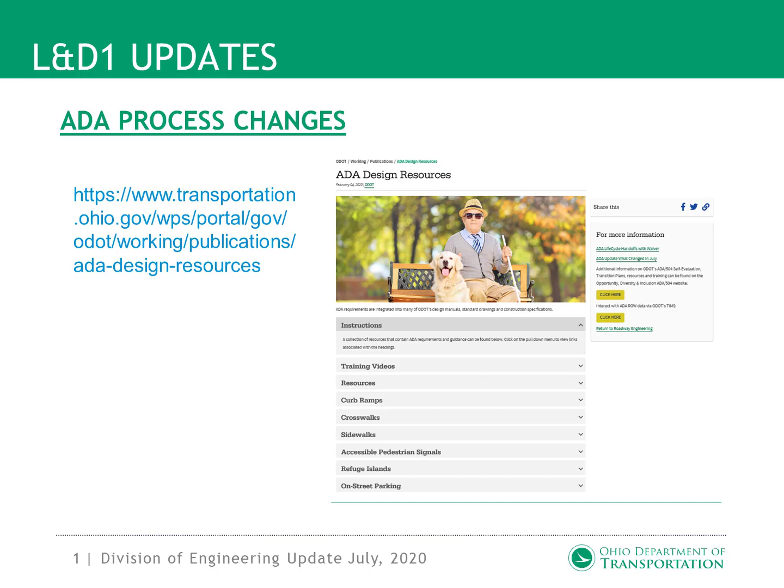Section 306.1.1 Exceptions to PROWAG. Recognizing that there are some situations where the construction of an ADA compliant feature is just not feasible, ODOT has developed a waiver process for documenting these situations. These situations have arisen in the past, but we haven't formally resolved the noncompliance by reviewing and documenting the issue.

Waivers may be granted based on the following conditions. Existing physical constraints include, but are not limited to, underlying terrain, right-of-way availability, underground structures, adjacent developed facilities, drainage, or the presence of notable natural or historic features.

Disproportionate cost equals 20% of the project cost. Also, for features that are outside the project scope. For instance, if right-of-way would be required to construct a compliant ramp and no other right-of-way is being purchased on a resurfacing project. These conditions apply for alterations of existing facilities only, not new facilities.

Section 306.1.2 Documentation Requirements. Waiver forms are required to document cases where an ADA-compliant curb ramp cannot be constructed. An electronic waiver form has been developed and can be found on the ADA website.

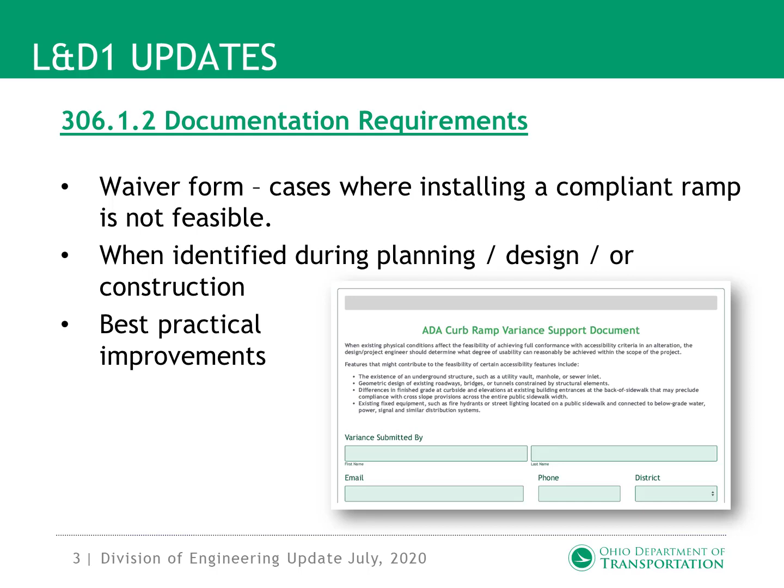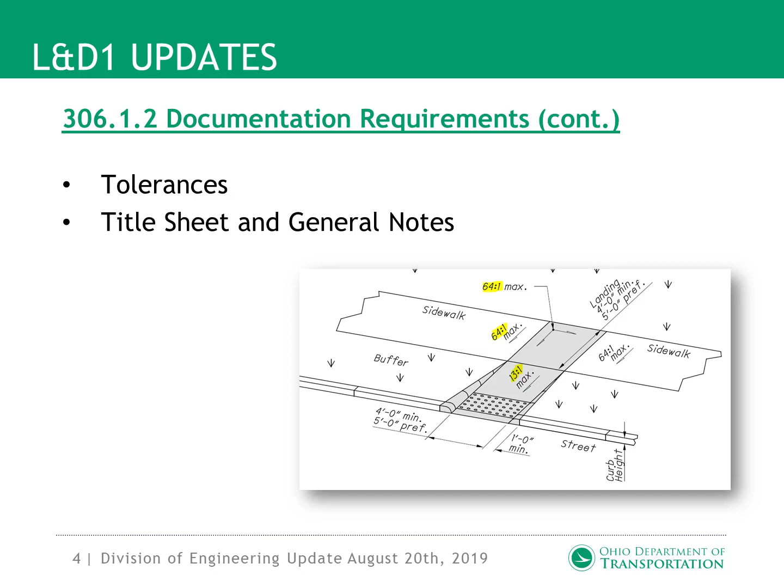Ramp slopes and cross slopes have been slightly changed to allow for a construction tolerance. Cross slopes changed from 50:1 to 64:1, and ramp slopes from 12:1 to 13:1. Waivers are only required where PROWAG standards cannot be met. The title sheet of a set of construction plans should note the presence of any waiver on the project, and further details should be supplied in the general notes.

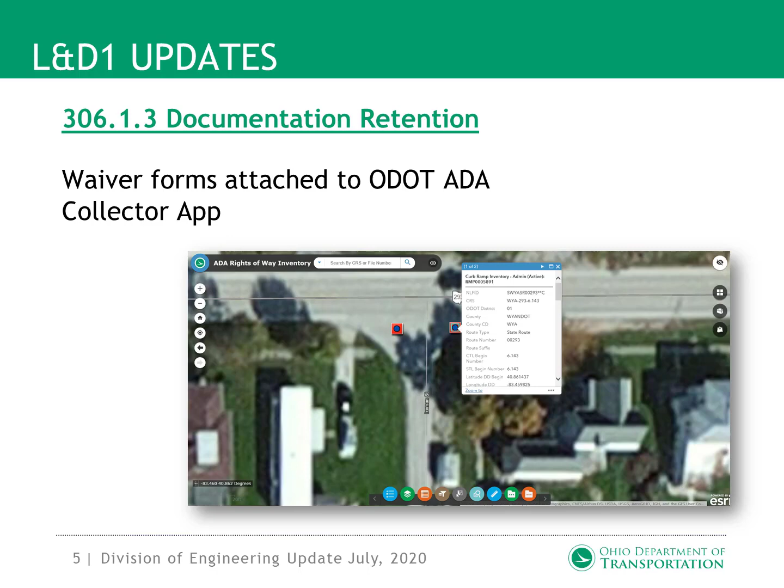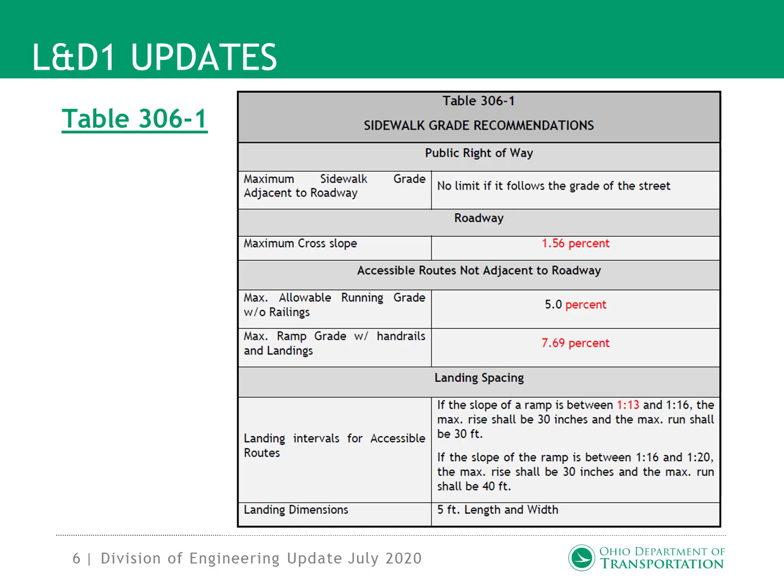Section 306.1.3 Documentation Retention. Approved waiver forms should be attached to the individual ramp in the ODOT ADA Collector app. This provides the department with a record of a waiver. For questions related to the Collector app, consult the District TAM Coordinator. Table 306-1, Sidewalk Grade Recommendations, was updated to reflect the change in slope and cross-slope values.

Section 306.3.4, Curb Ramp Types. Ramp types were organized into tiers of preference and design. Designers should work their way down the tiered list with a diagonal ramp being the last choice after all other design options have been exhausted.

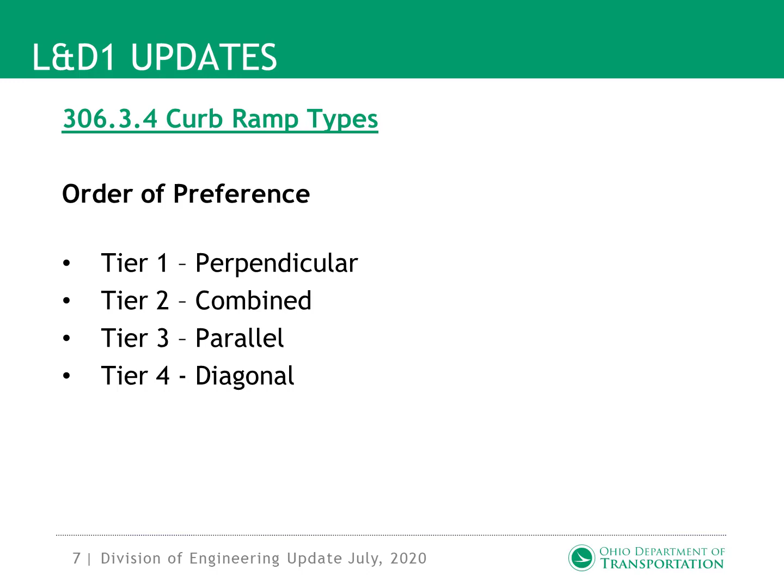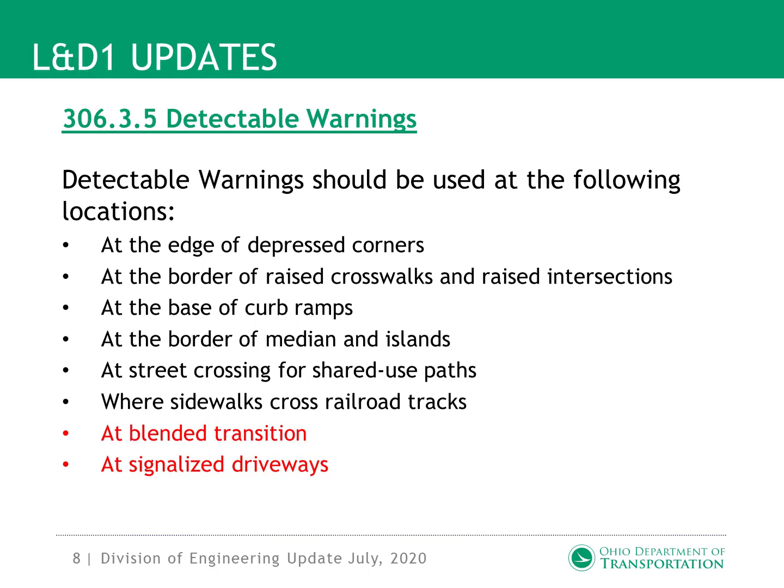Section 306.3.5 Detectable Warnings. Blended transitions and signalized driveways were added to the list of locations where detectable warnings are required. Section 306.3.8 Blended Transitions. There's been some confusion as to what a blended transition is, so we added a section defining one. It is basically a crossing where the sidewalk meets the street at a 5% or less grade. So these are very flat entryways. One big benefit to using a blended transition is that a landing is not required.

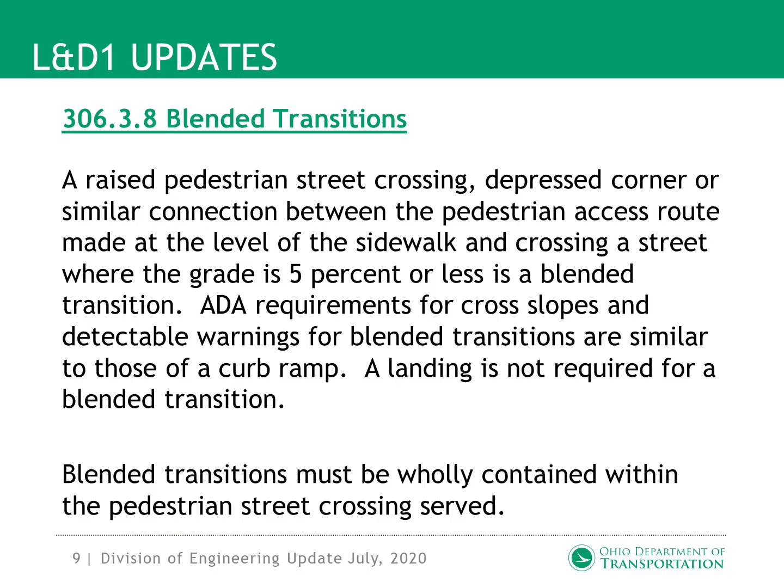Several figures were updated to the new slope and cross-slope values. These include figures 306-2, 306-3, 306-4, 803-2, 803-3, and 804-1.

Section 904.2.1 ODOT Guidelines for Community Gateway Monuments. This is a new section addressing issues with communities wanting monuments at interchanges. The definition of a gateway monument is any community-funded, freestanding structure or decorative sign, non-integral or non-required highway feature that will communicate the name of a city, village, township, or county. A community gateway monument may include the officially adopted seal, slogan, date of establishment, graphic, or logo that has been associated with the community.

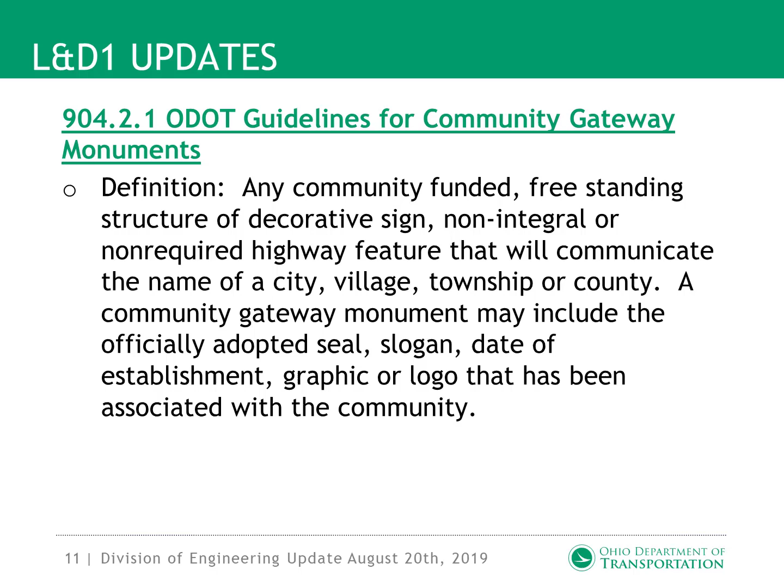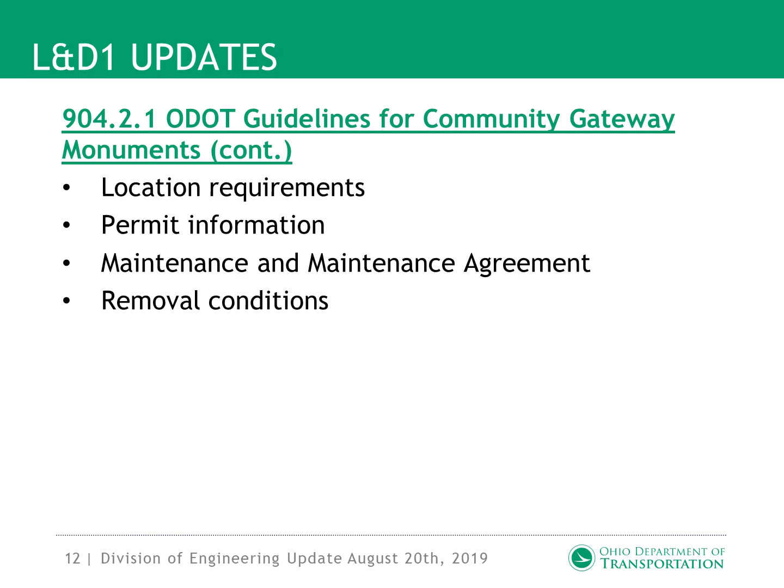Given within this section are location requirements, permit information, maintenance and maintenance agreement information, and removal conditions. The related information on what is allowed and not allowed is quite extensive and should be thoroughly reviewed when considering the approval of a monument.

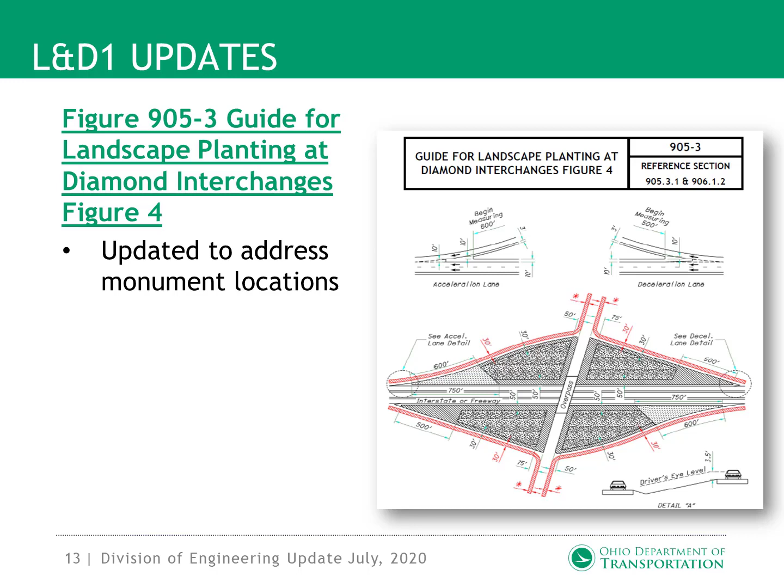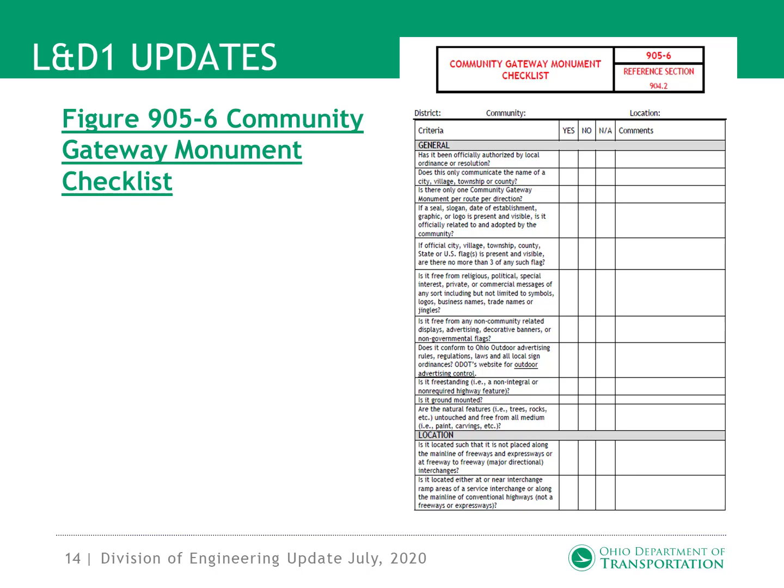Figure 905-3, Guide for Landscape Planting at Diamond Interchanges, Figure 4. The revised Figure 905-3 shows planting and monument restrictions on the outside limits of a diamond interchange. Figure 905-6 Community Gateway Monument Checklist was added to provide detailed guidance on monument eligibility, including location, size, maintenance, utilities, and appearance.

AASHTO released the second edition of the Guidelines for Geometric Design of Low-Volume Roads in 2019. The first edition addressed low-volume roads with 400 ADT or less. The new edition expands the definition for low-volume roads to minor collectors and local roads with less than 2,000 ADT. Since many of these roadways with low volumes also exhibit low crash frequencies, the new guidance gives designers flexibility by providing a recommended range of values for control criteria.

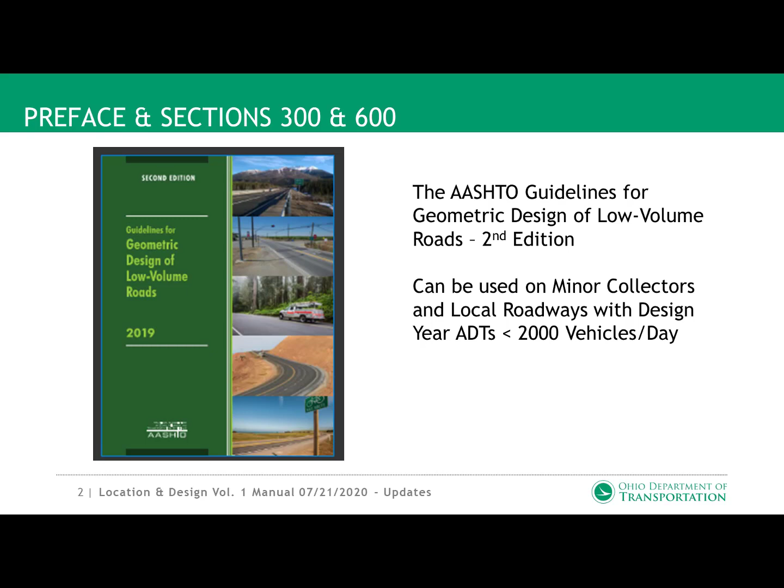Added guidance in Section 308.3.1 states that shared lanes, also known as sharrows, can be used on facilities that have a legal speed of 35 miles per hour or less. On facilities with legal speeds of 40 miles per hour or higher, shared lanes are not a good idea because of the speed differentials between a motor vehicle and a bicycle.

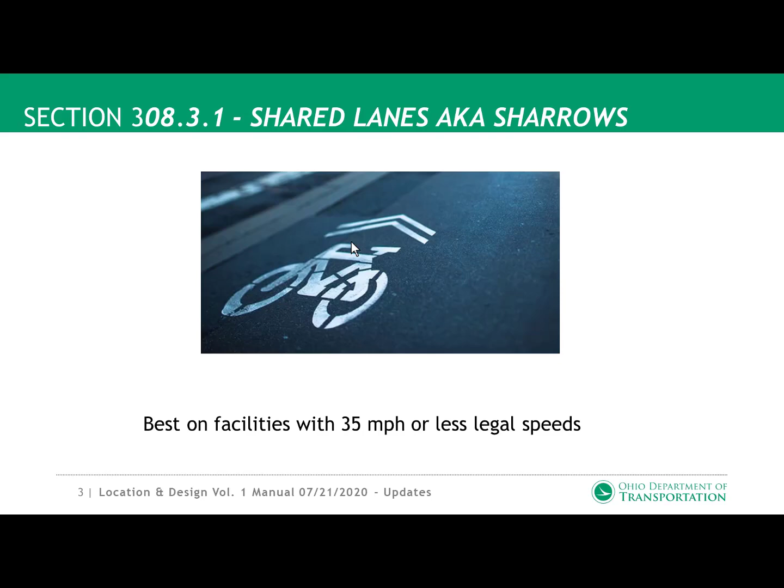A WB67 should be the preferred design vehicle instead of the WB62 for roundabouts at interstate, freeway, or expressway ramps intersecting an arterial roadway if the truck percentages are high.

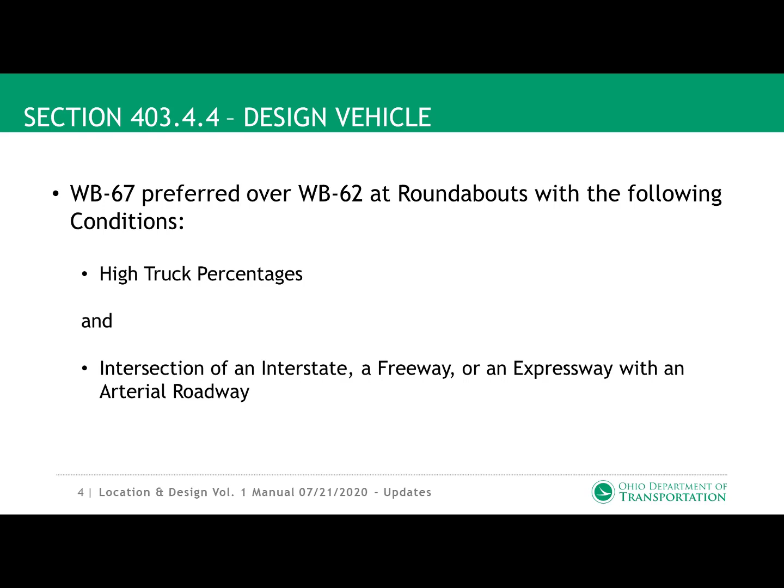Section 403.4.4.1 replaces design vehicle swept path with design vehicle tire tracking. The tire tracking is used to determine the curb locations at a roundabout. The swept path considered the tire tracking as well as the path of the truck, cab, and truck trailer. The swept path of the truck, cab, and trailer is necessary for vertical objects such as signs or poles, but not a factor in regards to curb placement. Tire tracking is more critical in curb placement.

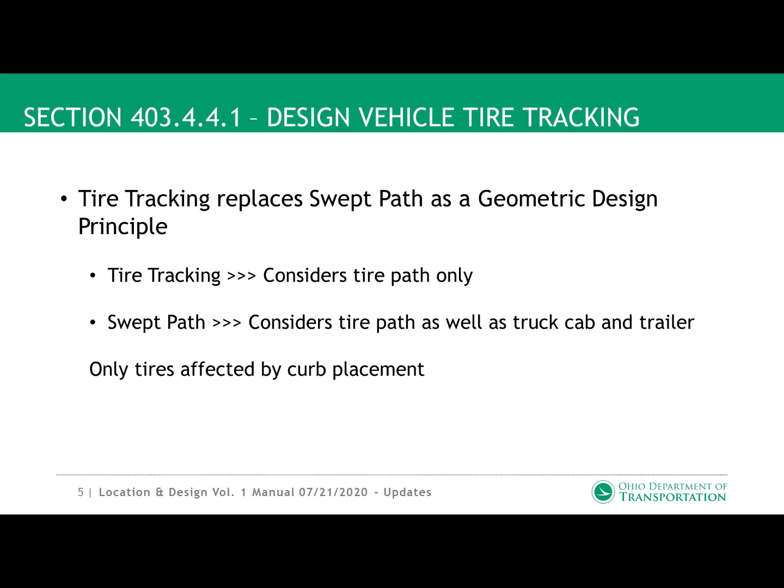Section 501.2.1.2 provides an additional limitation or disadvantage regarding the single-point urban interchange, SPUI. If a single-point urban interchange is built for an interim design year and will need to be expanded to the full build condition in a future design year, the construction costs for the expansion may be cost prohibitive.

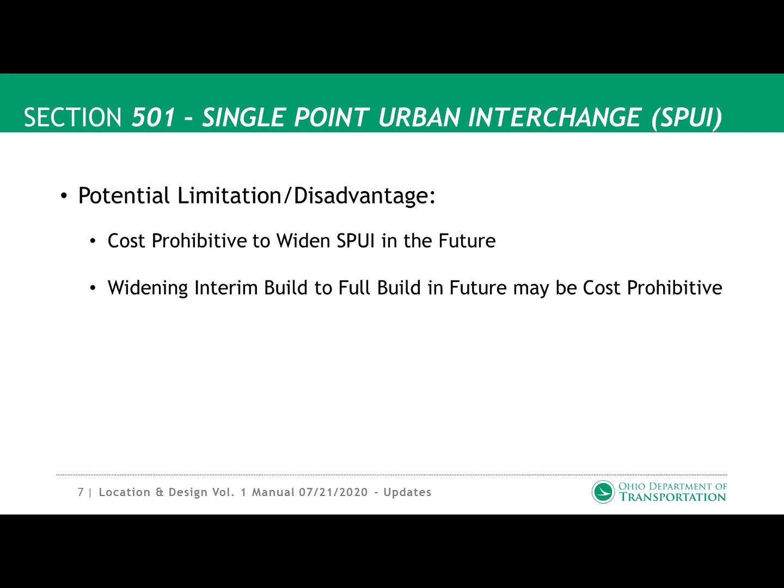Section 501.2.1.4 provides an additional benefit regarding the diverging diamond interchange, DDI. The bicycle pedestrian accommodations can be provided with either a single sidewalk through the median of the DDI or two separate sidewalks on the perimeter. The benefit of using the median sidewalk includes fewer ramp crossings, and the motor vehicle's left turns onto the entrance ramps is no longer in conflict with the bicycle and pedestrian traffic.

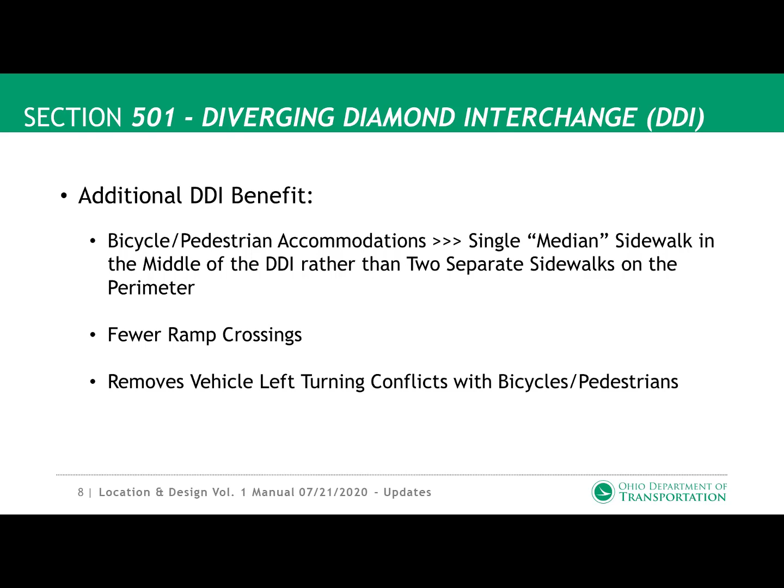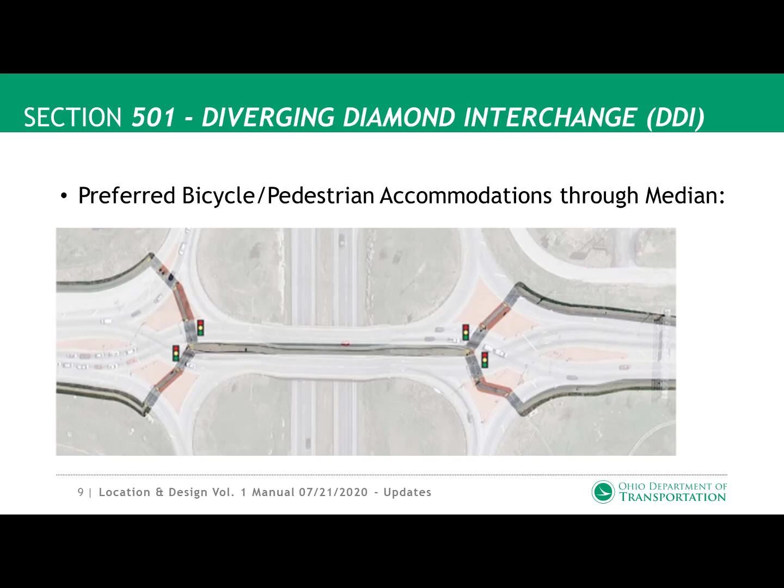This figure illustrates the preferred bicycle pedestrian accommodation through the median. This figure illustrates the alternative bike pedestrian accommodation on the outside.

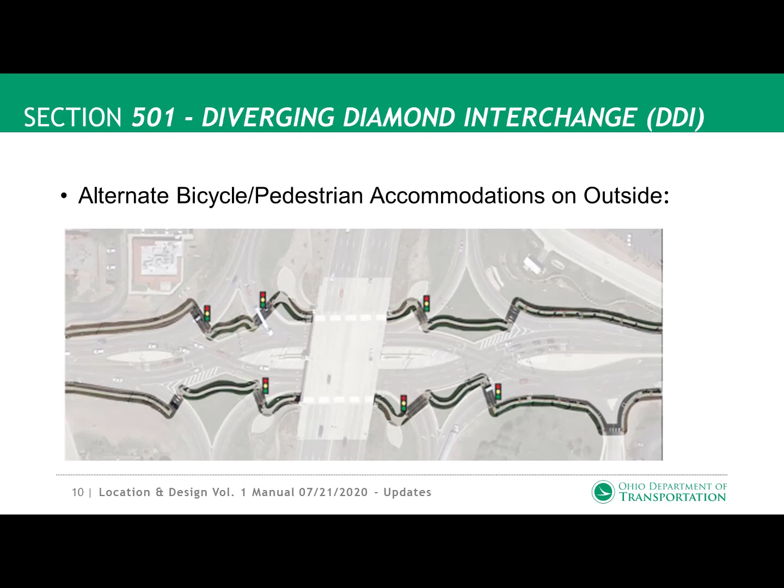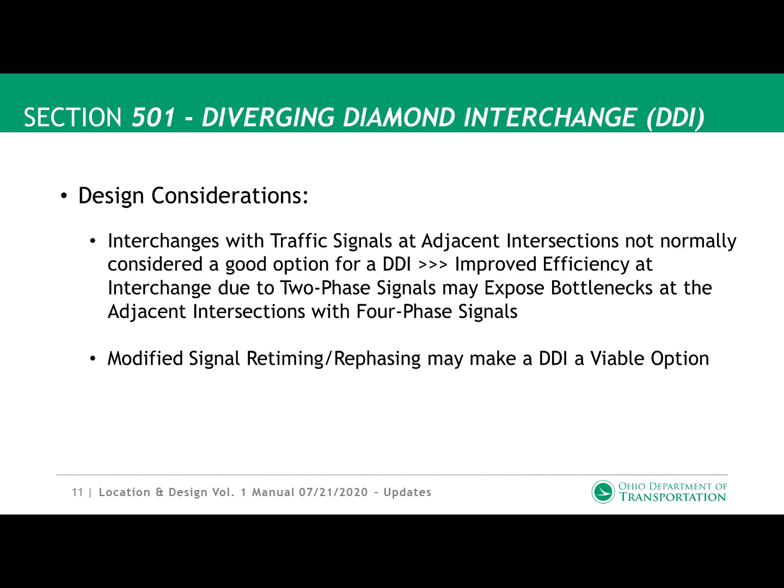Section 501.2.1.4 provides a design consideration regarding the diverging diamond interchange. The DDI may provide improved efficiency at the interchange intersections due to the two-phase signal operations, but it may expose inefficiencies and/or bottlenecks at the four-phase traffic signal operations at the signals adjacent to the interchange. This situation may have dissuaded the selection of a DDI as an option. However, retiming and/or rephasing at the adjacent traffic signals may allow the DDI to be a viable option.

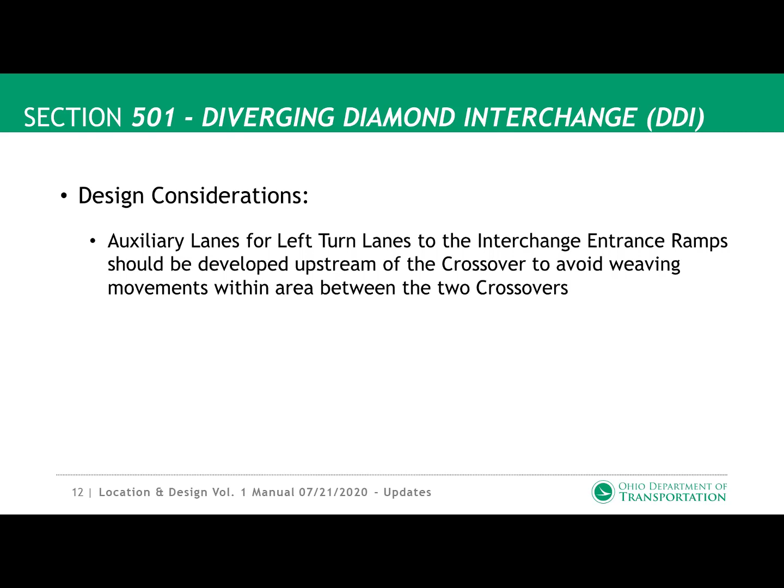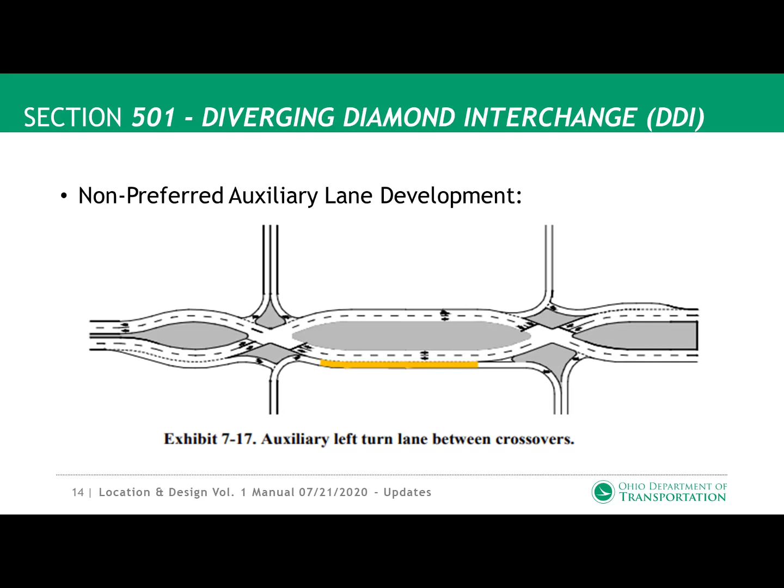Section 501.2.1.4 provides several additional design considerations regarding the diverging diamond interchange. The design speeds for the crossover alignments should be at least 10 miles per hour, but no more than 15 miles per hour below the legally posted speed limit. The left turn lanes on exit ramps should have enough curvature to ensure drivers turn into the inside through lanes and not make a wrong way turn. The left turn on the exit ramps should be placed as close to the crossover as possible to reduce clearance time, all red, to improve signal efficiency.

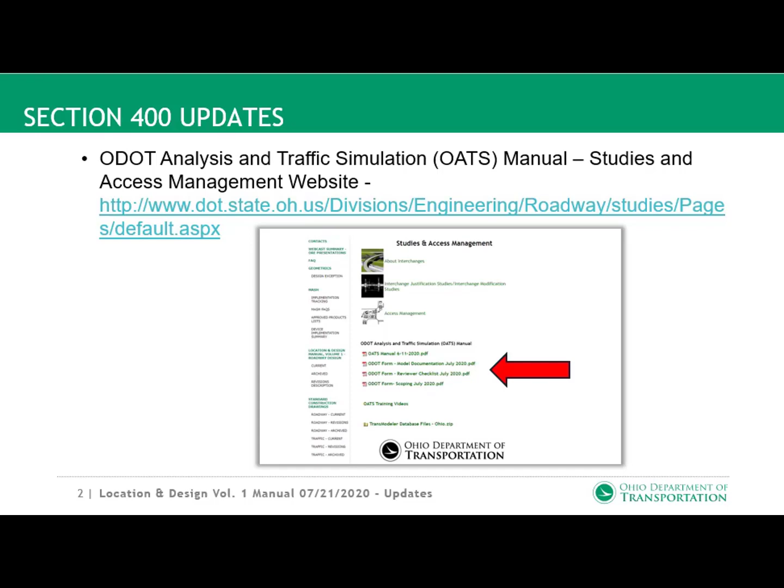Throughout Section 400, there are various references to the new ODOT Analysis and Traffic Simulation Manual, also known as the OATS Manual. This manual can be found at the link below, as well as additional resources such as the Model Documentation Form, Reviewer Checklist, Scoping Form, and some useful OATS training videos. A TransModeler database file for the entire state of Ohio can also be downloaded for use with TransModeler analyses.

Section 401.2.1 Signals. The method for balancing intersections has been revised to allow for more delay on the minor streets instead of balancing the delay for the minor and major streets as before. This more accurately represents how the signals will be timed in the field after installation. The goal is to minimize the overall delay without having significantly unbalanced approaches. All individual lane volume to capacity ratios for both the major and minor street must be less than 1 and preferably less than 0.93.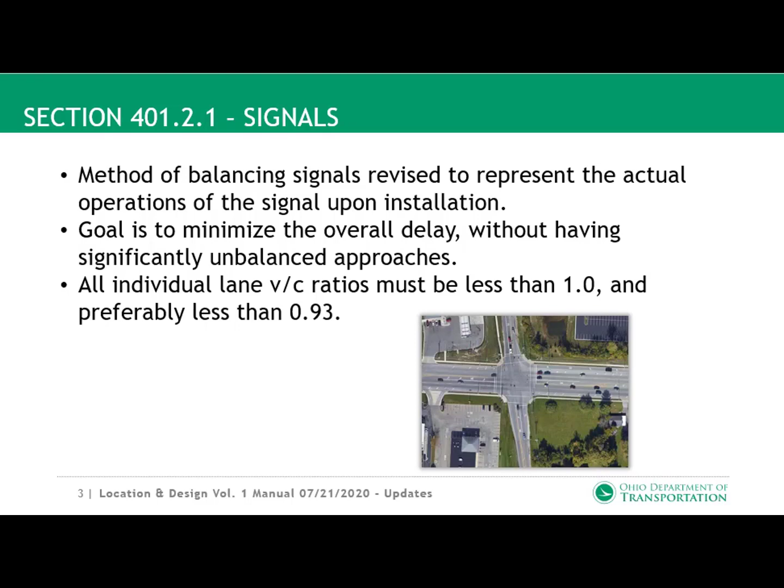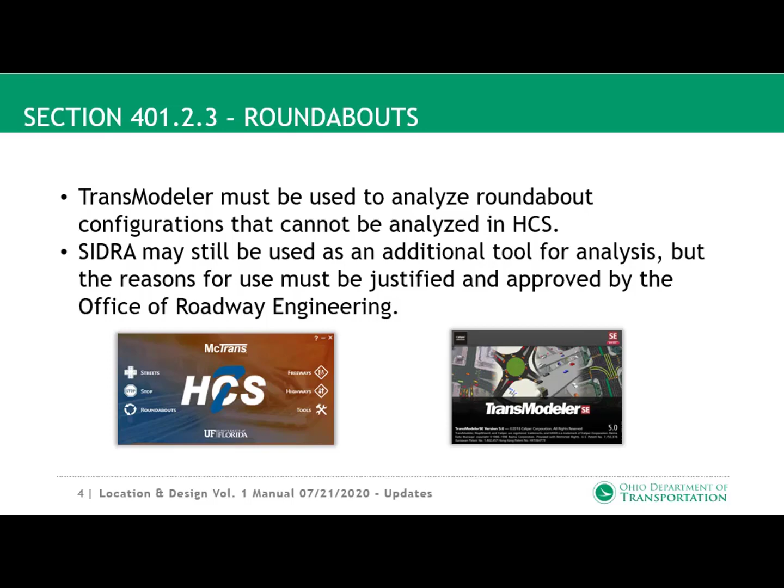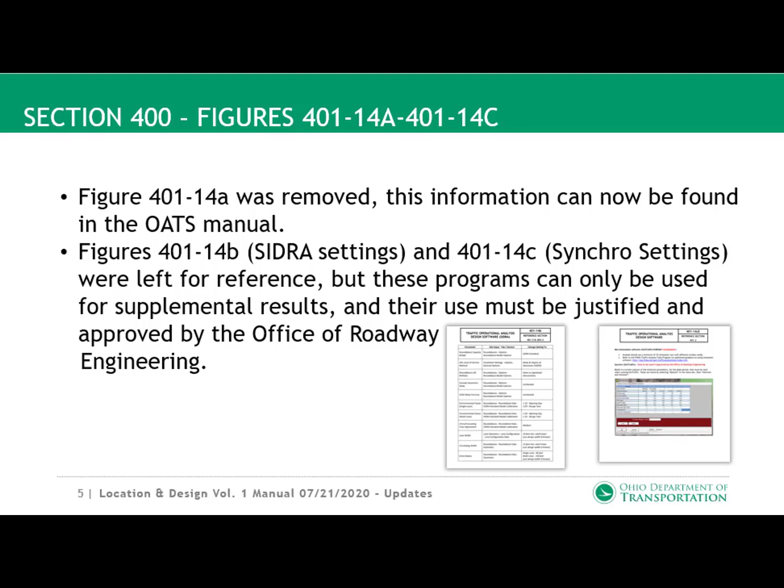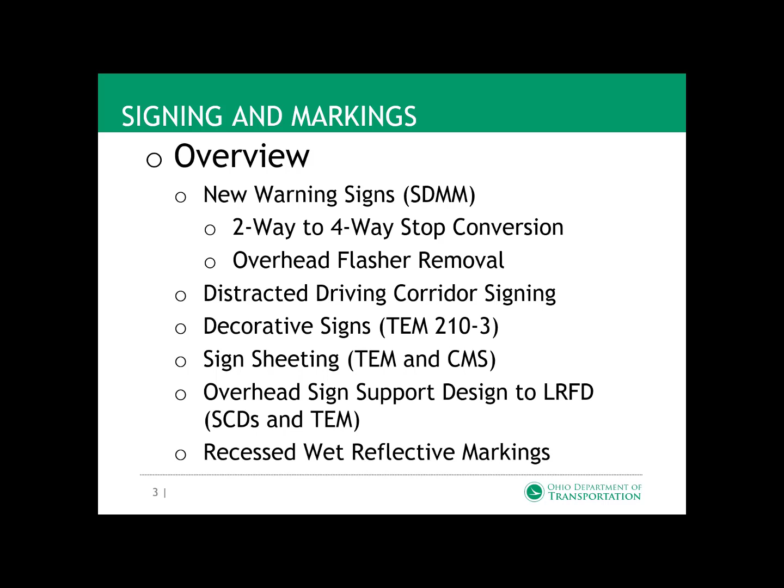The following presentation will describe the standards and specification changes for signing and markings that have been made in the April and July 2020 specification updates. The point of contact for signing and marking specifications is Dwayne Soyson, who can be reached at the listed email address and phone number. During this presentation, I will be describing the recent changes to signing and markings, including 2 new warning signs, distracted driving corridor signing, decorative signs known as community gateway monuments, sign sheeting, overhead sign support design in LRFD, and the recessed wet reflective pavement markings program.

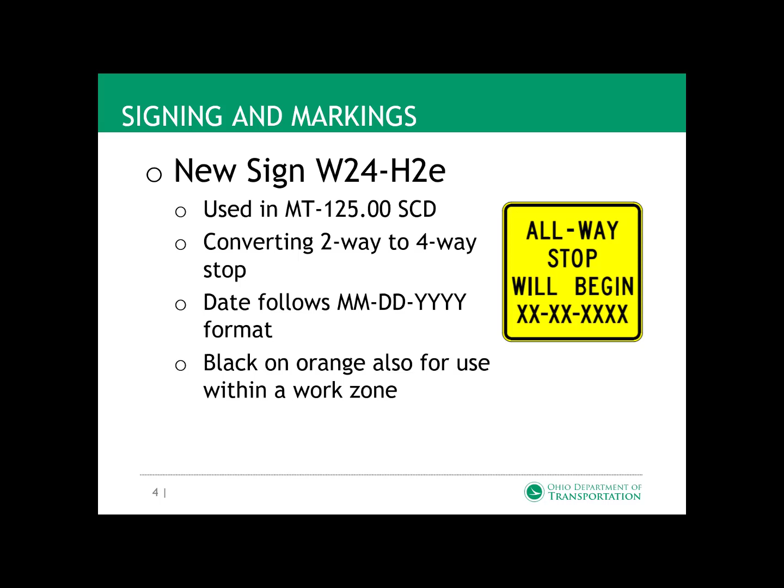Prior to implementing a two-way to four-way stop conversion, the public shall be given advance notice of the implementation by using a special sign. This sign, which is shown in the standard construction drawing MT 125.00, is to be provided in all plans which require the implementation of a two-way to four-way stop conversion. The sign design information can be found in the Sign Designs and Markings Manual.

Similarly, prior to deactivating an overhead flasher, the public shall be given advance notice of the deactivation by use of special signing. This sign, which is shown in the new Traffic Standard Construction Drawing MT 125.50, is to be provided in all plans which require the removal of an overhead flasher. The design information for the sign can be found in the Sign Designs and Markings Manual.

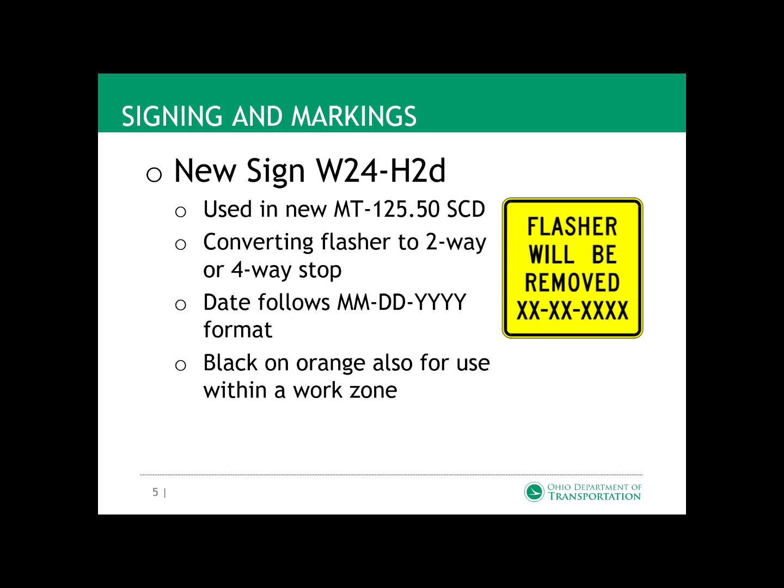Because distracted driving poses an increasing danger to Ohio families, the Ohio Department of Transportation Highway Safety Program and the Ohio State Highway Patrol have been working together to establish distracted driving corridors to discourage distractions behind the wheel, as well as speeding, aggressive driving, and other dangerous behaviors that lead to crashes.

7 different signs have been developed for potential use within a distracted driving corridor, including: safety corridor speeding and distracted driving, entering distracted driving corridor, safety corridor next X miles zero tolerance, X days since last serious crash, it can wait, this could be your last text, and leaving safety corridor.

Decorative signs have been recategorized as community gateway monuments, and guidance can be found in the Location and Design Manual, Volume 1, Section 904. A community gateway monument is defined as any community-funded freestanding structure of a decorative sign, non-integral or non-required highway feature that will communicate the name of a city, village, township, or county. A community gateway monument may include the officially adopted seal, slogan, date of establishment, graphic, or logo that has been associated with the community.

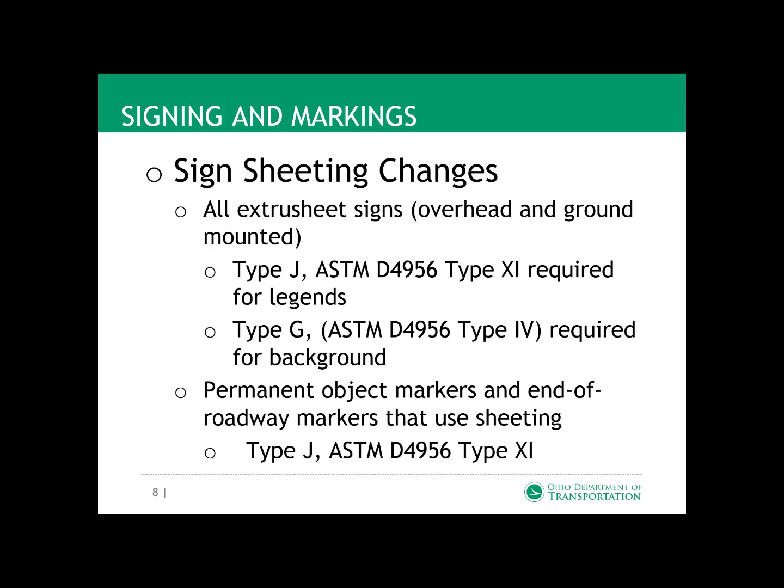The Office of Roadway Engineering has been working toward bringing ODOT more in line with the AASHTO structural standards by replacing the standard drawings that involve signal and sign supports and their foundations, utilizing AASHTO Load and Resistance Factor Design (LRFD) specifications for structural supports for highway signs, luminaires, and traffic signals.

One major change is the deletion of the aluminum truss from the available standard construction drawings. To meet the fatigue requirements of the AASHTO LRFD LTS-1, the aluminum members would have to be made so large that they became essentially the same weight as steel, making them impractical.

One other minor change includes a reduction in the available number of designs for cantilever sign supports from 12 to 3. The new design charts have been posted in the TEM, and I will show you an example in the next slide.

All of the new drawings will have new numbers assigned to them. For example, TC 15.115 will be replaced with TC 15.116. 16 TC drawings have been changed.

The new standard construction drawings shall be implemented on all department projects that have begun Stage 1 plan development after April 17, 2020. Projects further along in the development process should be considered on a project-by-project basis.

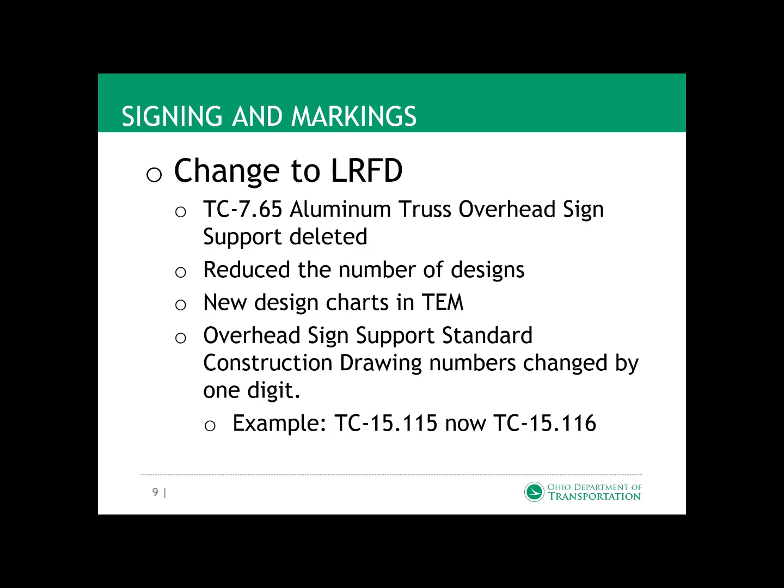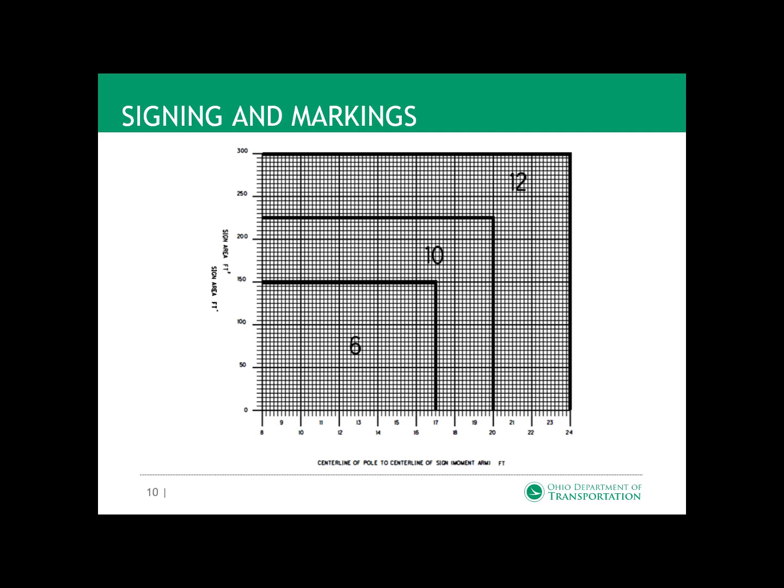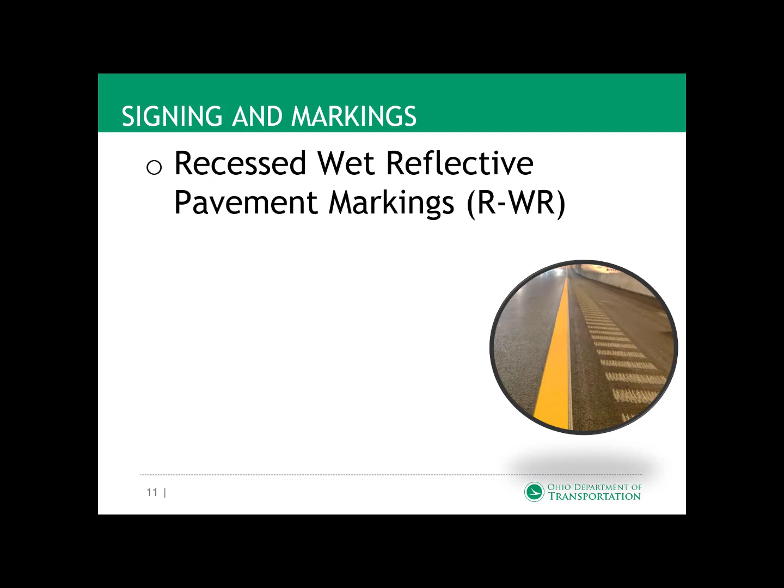In an effort to improve pavement marking performance, particularly during rainy night conditions, ODOT has implemented the Recessed Wet Reflective Pavement Marking Program. We started this summer with a pilot project that will install the recessed wet reflective markings in 10 different locations across the state.

What we learned from the pilot locations will help us adjust our specifications for future projects. Beginning in next year's construction season, the use of recessed wet reflective markings will be more widespread.

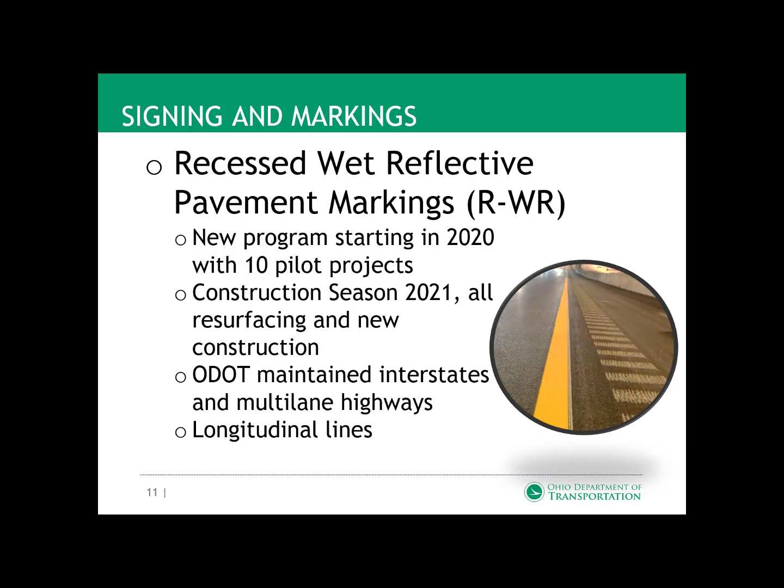All resurfacing and new construction projects on ODOT maintained interstates and multi-lane highways will use recessed wet reflective markings for the longitudinal lines. Also, all Class 1 work zone markings will be wet reflective. Since work zone markings are temporary, the extra protection of the groove is not necessary.

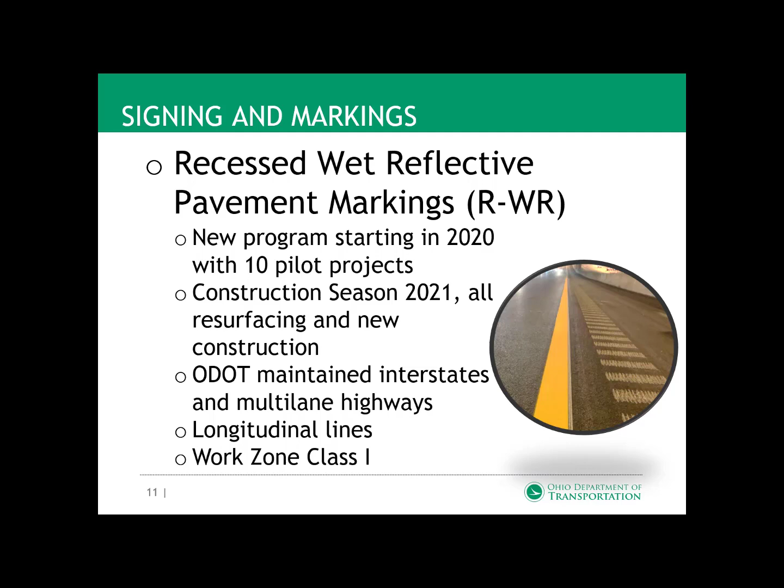All resurfacing and reconstruction projects on interstates and multi-lane highways should receive recessed wet reflective markings as their eventual final permanent pavement markings. Timing of when each project gets the recessed wet reflective marking is dependent on the completion date of the project. It is recommended not to include the recessed wet reflective marking in the resurfacing reconstruction plan itself

if it has a late summer or fall completion date. Rather, those projects should include a lower cost standard marking, not recessed wet reflective, that will last through the winter and until the district-wide recessed wet reflective pavement marking plan installs the permanent markings.

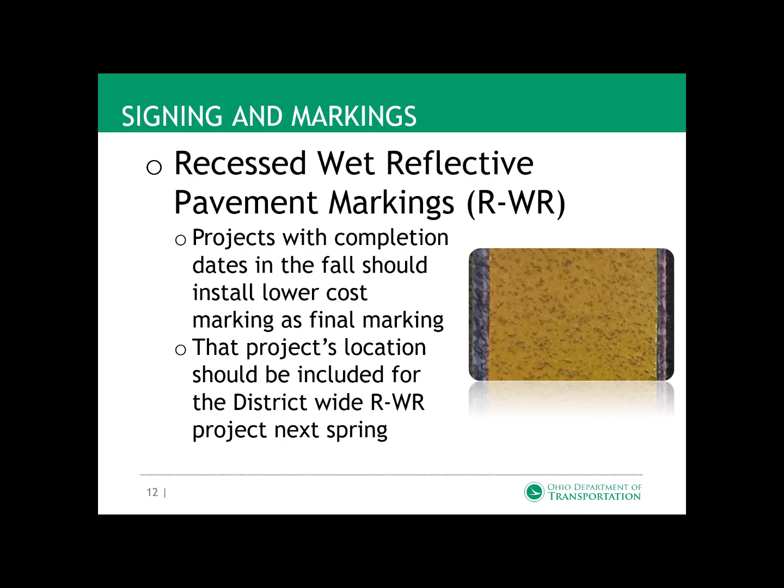The Traffic Engineering Manual will be updated in January 2021 to reflect these changes. 3 new specifications with respect to wet reflective optics have been published and should be used when appropriate.

Supplemental Specification 807 gives instructions to the contractor for furnishing and applying wet reflective liquid applied markings. This should be called out on the title sheet when wet reflective markings are used.

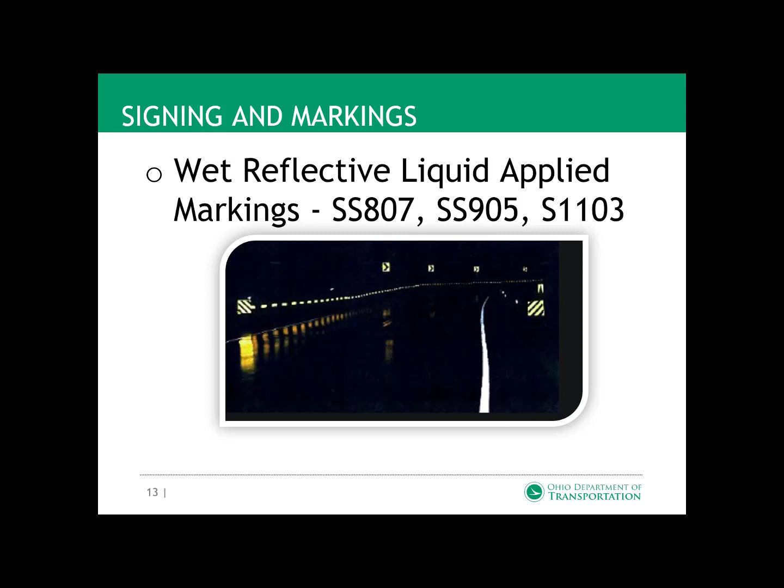Supplemental Specification 905 establishes the material requirements for the wet reflective optics. Supplement 1103 describes the procedure by which the department will establish and maintain a list of approved wet reflective optics.

To help protect the more expensive wet reflective markings, they need to be recessed in a groove. Supplemental Specification 850 is to be used with permanent wet reflective pavement markings. Ensure Supplemental Specification 807 and 850 are referenced on the plan cover sheet.

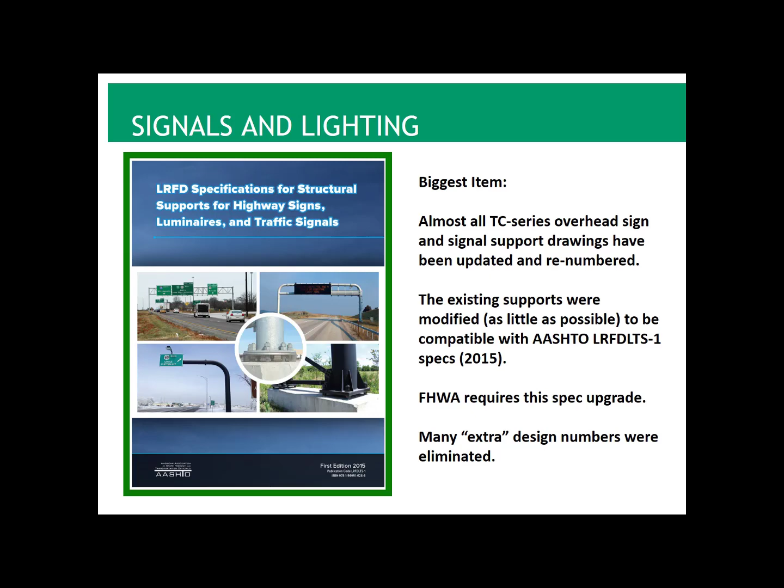And it's the factors that are kind of the interesting part. For loads, those factors are generally greater than 1 because there's some uncertainty in the magnitude of the loads. For resistance, that number is usually a little less than 1, because that accounts for some variability in the actual material properties, fabrication, and other things associated with the structure. It's mostly just housekeeping stuff—nothing has fundamentally changed in terms of the physics of the strength of the structure and resisting the loads.

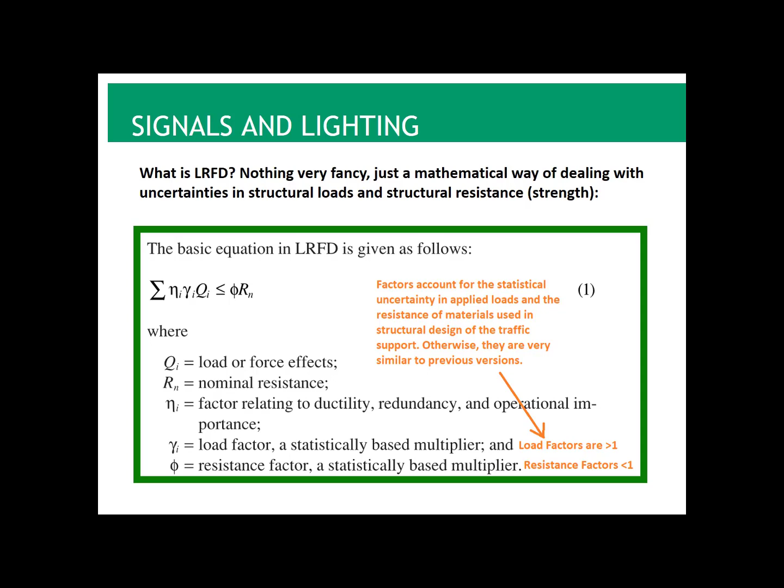Most ODOT sign and signal support designs were pretty old to begin with, prior to this change, and I've been able to trace most of them back to old Union Metal catalogs I found from the 1960s. There's a large selection of design numbers available in those early drawings, and moving from one design number to another, the differences in dimensions were actually pretty small at times, so it seemed kind of silly to have so many. Over the years we did tend to add design numbers as things got bigger—arms got longer, roadways got wider, things like that. So we added even more design numbers.

The original designs were based on what we call allowable stress design methods, with a rather big lumped factor of safety that accounted for all the different individual variables, including fatigue. Now LRFD is a little more modern approach to this. It isolates and sums up the individual load and resistance inputs rather than lumping them all together into one factor of safety.

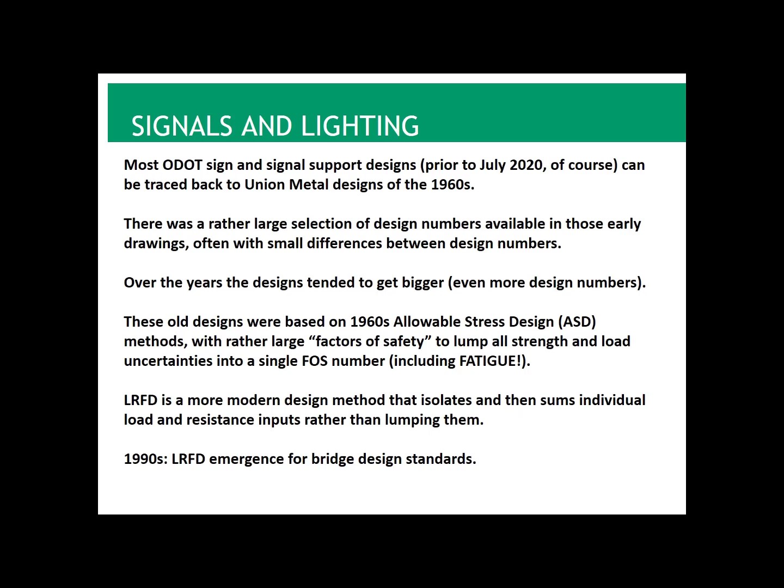LRFD came out kind of in the 90s, I think. Even as an electrical engineer, I remember hearing about that when I was in school. So it's nothing new, but it is something new for us in roadway engineering to be applying these methods to signal and sign supports. So what follows is a real quick summary of the changes that we made to the drawings related to this compliance migration for LRFD LTS-1.

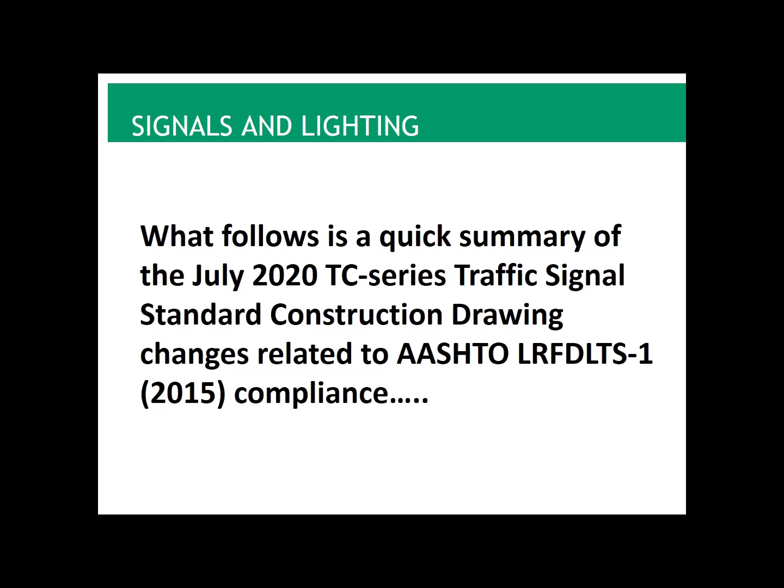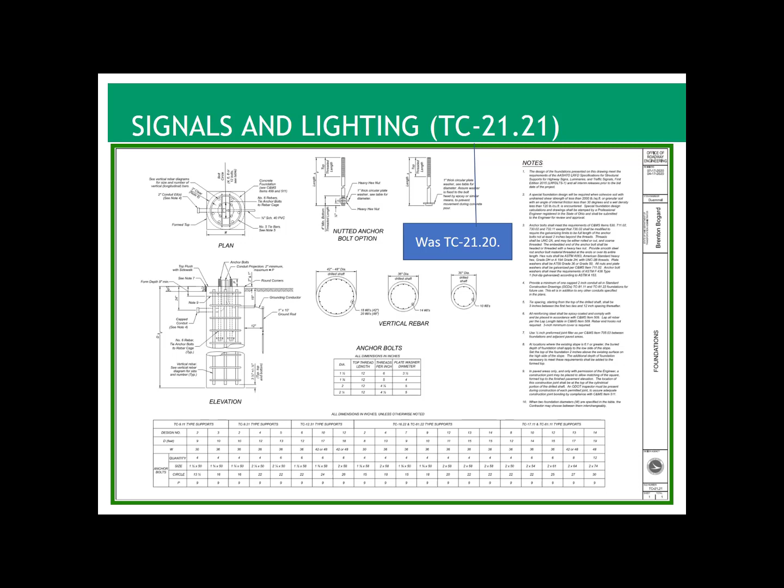We'll start with our foundations drawing. Now this is an interesting standard drawing because it refers to many other different standard drawings in the table below. So because most of the standard drawings for signal and sign supports that this drawing refers to changed, this drawing itself had to change. This drawing used to be TC 21.20. In order to distinguish it with the new standards and everything, it has become TC 21.21.

Now, what's interesting is that one of our goals with this migration was to try to keep as many things identical to the old designs as we could, and we were pretty successful. Not everything is exactly the same—there have been a few slight changes in the foundation details. Some of the anchor bolts have changed, maybe the circles or the physical size of the anchor bolts and things like that. So the changes can be pretty subtle.

The table reflects the new drawing and design numbers that are available. People have to be pretty careful, both designers and contractors, to make sure that they follow the right foundation table for the correct drawings, because the foundation in a TC 21.21 drawing is not necessarily the same thing for the same foundation in a TC 21.20 drawing—that was the previous edition. They can change very slightly, but a slight change in your anchor bolt size or circle could mean that the pole isn't going to fit. People need to be really careful with these new drawings.

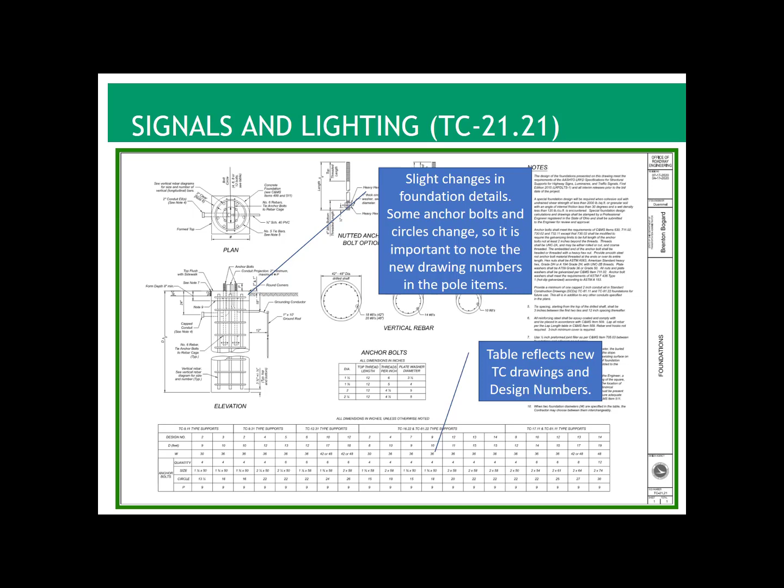Now, one of the first signal supports that we run into in the series of drawings is the TC 81.10, now TC 81.11. That's our strain pole for span wire supports. This one has changed a little bit. I'm not going over any individual changes here, just pointing out the broad highlights. Not a whole lot of those changes are obvious. You'll notice there are more notes because we're pretty thoroughly documenting the design standards we use, so that in the future people are very clear on how the loads and stuff were arrived at for designing with this particular support.

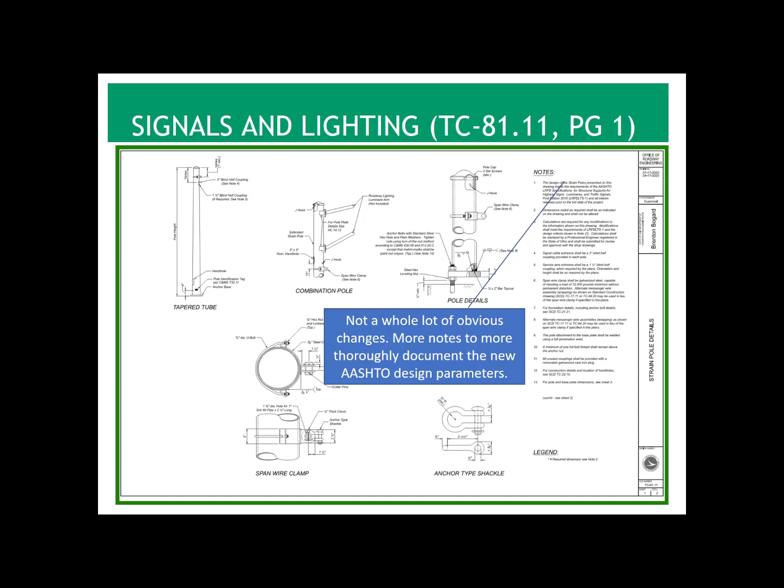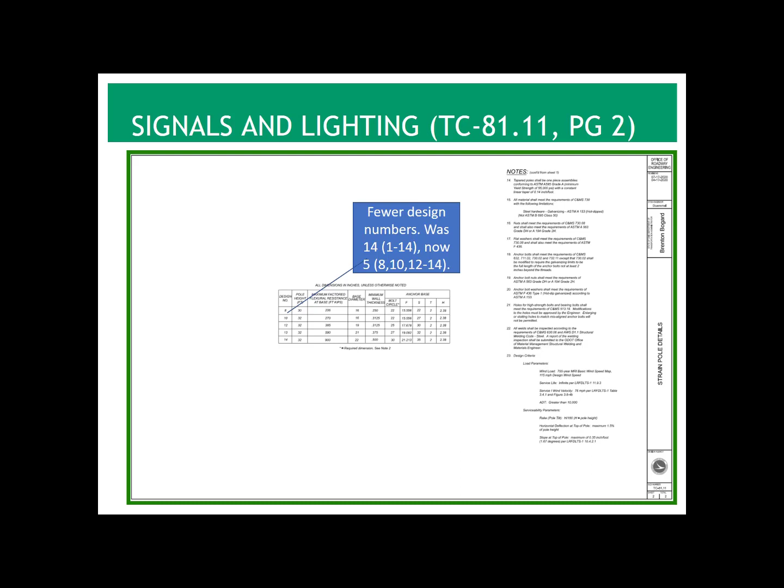There's the second page. One of the interesting things that's happened with this particular design is that we've reduced the number of designs quite a bit. There used to be 14 of them, design 1 through 14. We took a look at those and reduced them to 5. So now we only have 8, 10, and then 12, 13, 14. It's a lot cleaner and allows people to not have to choose between so many. Some of those were really small and almost never got applied anyway, so that's why we eliminated a lot of the designs on the smaller end of that range.

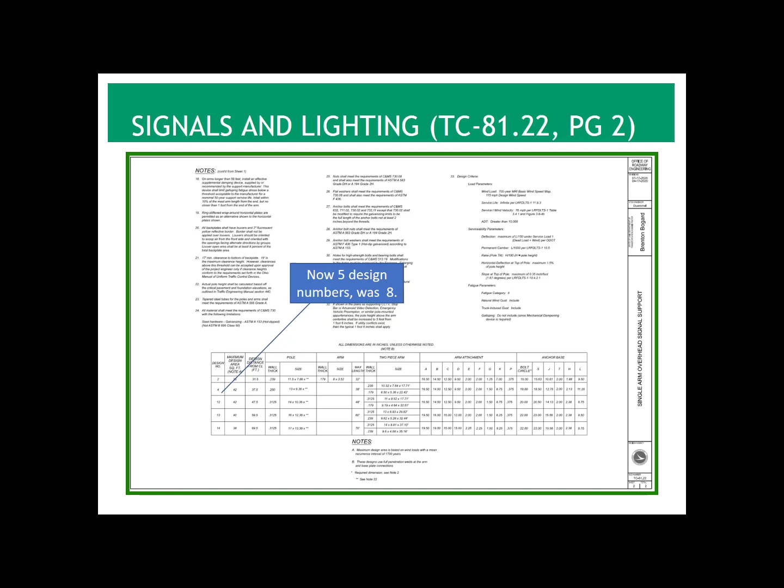Like I said, there are some notes there to denote the compliance that we do. Now, we used to have 8 design numbers. We've reduced that to 5 in this case, so that's pretty helpful. And that's it for the signal supports. There were a lot more sign supports that changed, so hopefully Dwayne has covered that in his section of the webcast.

Now, the only other things in this spec release that I thought deserved some attention - one, after a lot of discussion, is I changed a little bit of the detail on the pull box lids. We've always had a countersunk and flathead screw arrangement on the corners, which works reasonably well on day one, and then after that they get clogged up with dirt, and people don't put them back in. So after a lot of discussion with the districts, we decided to put a hex head bolt on the corner, and the old flathead screws are kind of gone.

I did put a washer on there that's almost like a temporary feature. I'll make that optional at some point. That was there in case people wanted to use the old lids with the countersink in it. You can put the washer on there to keep the head of the nut from going down into the countersink. Not real clear on the drawing - I need to straighten that up just a little bit on the next release.

But basically, we've gone to an external, ordinary stainless steel hex head type bolt on each corner, and that should be a lot easier for the maintainers to deal with, and maybe there's a good chance that they'll actually get reinserted after the pull box is used. Currently, right now, a lot of times people don't even bother putting the screws back in because there's such a problem, and so the pull box lid is just sitting there by gravity.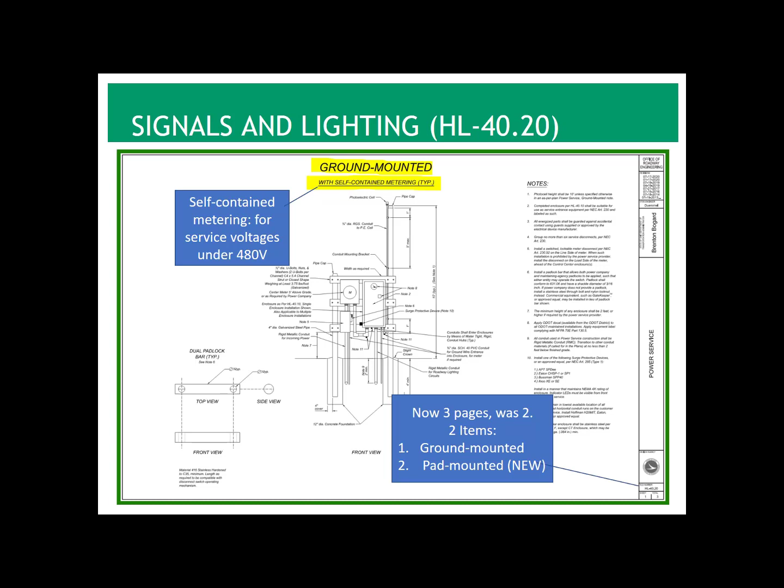The next page is essentially the same drawing, but you can see it's grown an additional cabinet, that big yellow thing down there on the left. That's what we call ground-mounted power service with CT, or current transformer, metering. That's generally a requirement for most power companies now for power services of 480 volts or higher, but ODOT usually only uses 480. That's pretty common on some of our lighting installations, so we're going to start to see a lot more power service with this extra cabinet included.

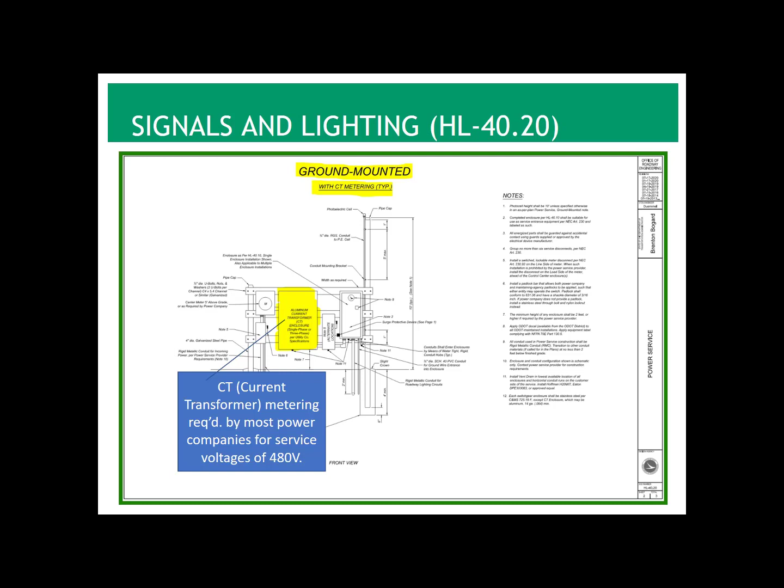So I just went ahead and made a drawing for that. The new page is the next one. This is a new style of pad-mounted power service. These types of pad-mounted enclosures are often kind of off-the-shelf devices you can buy. Milbank makes a lot of them, and they're popular with locals, especially in urban areas. Traditionally, ODOT didn't use them. They're not real good for our remote roadside locations because the weeds and grass can grow up around them and they kind of get lost, and there's a chance they get hit with a bush hog or something while somebody's mowing.

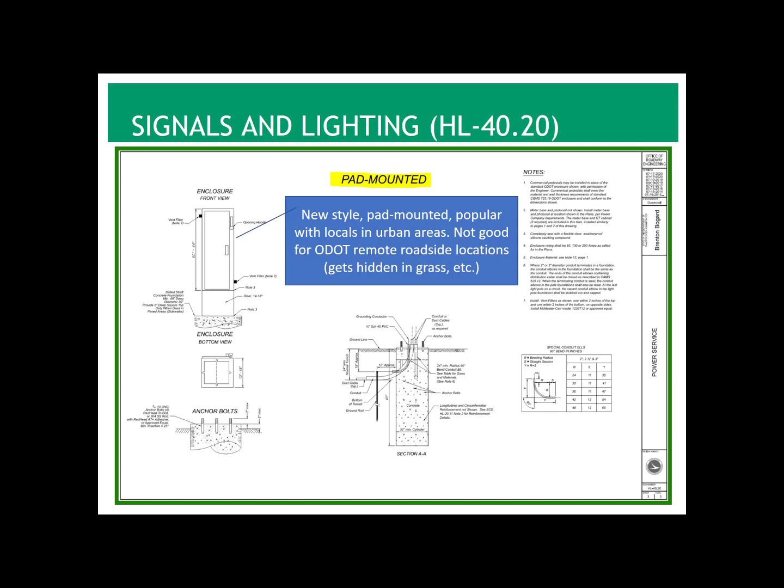So we've never really endorsed this type of thing for our own use. But because the locals were using so many alternative designs that were kind of weak and thin and prone to rust, I decided that I would just go ahead and modify the design, and worked with our main vendor to build a ground-mounted, pad-mounted power service that used the traditional big thick stainless steel enclosure that ODOT likes to see for our control centers. So that's this new design. Designers are free to use this. They would just call that out as a power service, pad-mounted as per plan, and refer to this drawing, and then the contractor would build it accordingly.

And that's basically all the changes that I cared to summarize at this particular release. Once again, you got my contact information if you have any questions, and I'll be happy to provide that.

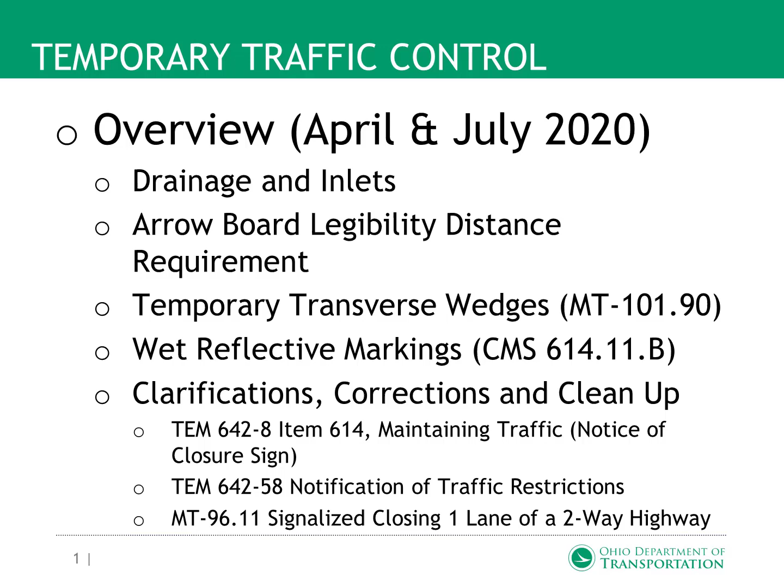These are the publication changes from both April and July 2020 that we plan on highlighting here today. First up are two sections in the TEM that have been added: 640-5.5 under use of shoulders, and 640-12.5 under crossover construction. Both of these sections deal with drainage, temporary drainage and inlets, and provide some additional guidance and considerations for when shifting traffic onto the shoulder or using a crossover MOT scheme.

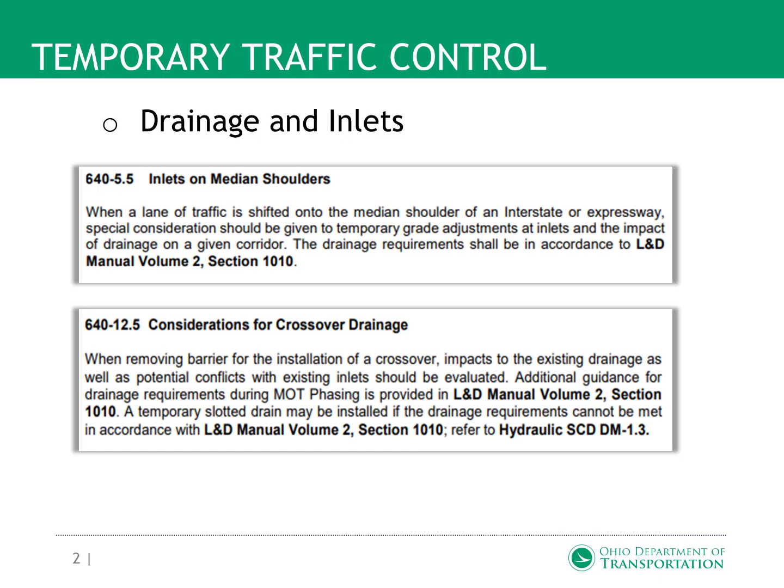We updated Supplement 1021, which is the Arrow Board pre-qualification procedure. We updated the minimum effective legibility distance to 1 mile to align with the OMUTCD in regards to Type C Arrow boards. Prior to this change, it was 4,800 feet due to a field condition limitation during the NTPEP testing. This measurement limitation is no longer a factor, and current evaluations from NTPEP are coming in assessed to the full mile legibility distance now. At this time, we're not requiring those who are already on our approved list to go back and be reevaluated. Even under the prior evaluations, the product may have been legible at longer distances than the previously reported maximum of 4,800 feet.

However, that was just the furthest the facility was able to measure at that time. So just because it was reported at 4,800 feet doesn't mean that that was necessarily the limitation of the unit at that time.

We have added temporary pavement wedges at transverse joints in open travel lanes, paved shoulders to the drop-off standard construction drawing MT-101.90. We added that to address concerns with bumps caused during the placement of different pavement courses. We've limited this wedge to a 3-inch maximum thickness to coincide with the limitation of only using it with a single lift of pavement at a time.

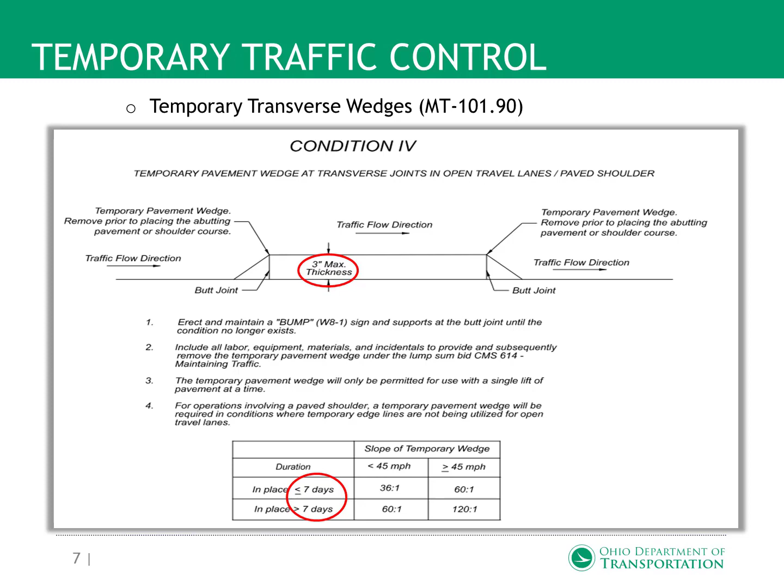The construction and material specifications have been updated to accommodate projects in the wet reflective marking pilot, where temporary wet reflective markings are specified for use. In January 2021, we anticipate bringing forward additional publication changes to match the current wet reflective pilot guidance, which requires wet reflective for all Class 1 temporary markings. Grooving for temporary wet reflective markings is not necessary per the pilot guidance.

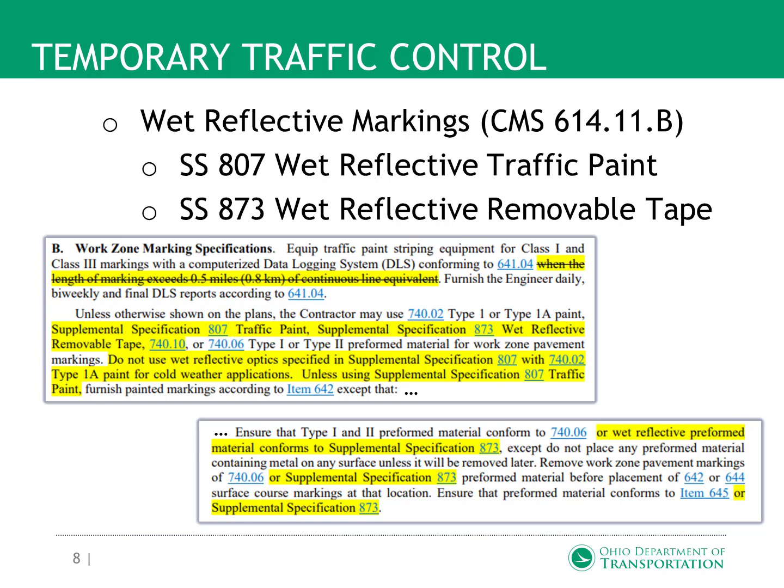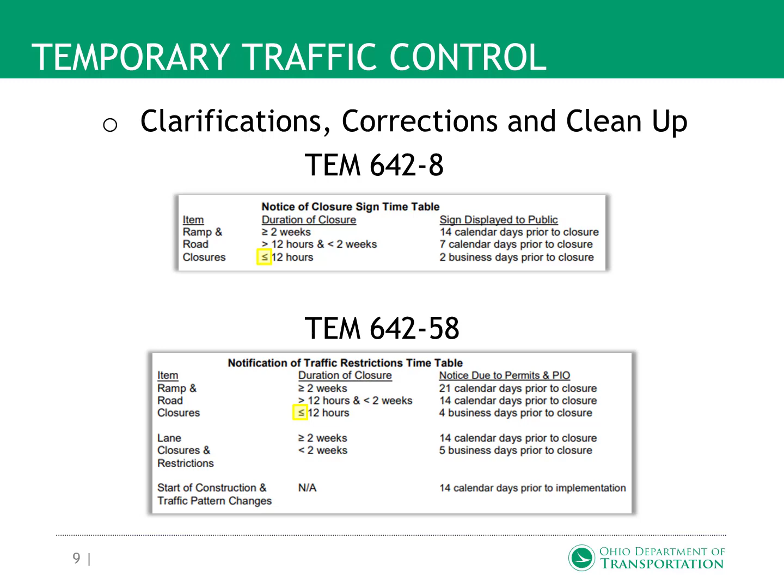In this slide and the next, we have some clarifications, corrections, and cleanup work. For this slide, we have two plan notes, TEM 642-8 and TEM 642-58. They're somewhat related - one is notice of closure signs, the other is notification of traffic restrictions. Both have somewhat similar tables for a portion, and the value for exactly 12 hours was not addressed in these tables, so we've updated them to ensure that 12 hours exactly is included.

Due to changes being made by the Office of Traffic Operations for portable traffic signal detection, we needed to implement some updates in the MT Standard Construction Drawing MT-96.11, which is a signalized closing of one lane of a two-way highway, in order to require non-invasive detection at each signal location, and also to update some CMS references throughout the SCD. At the same time, we went through and updated some other language simply to convert it over into active imperative mood.

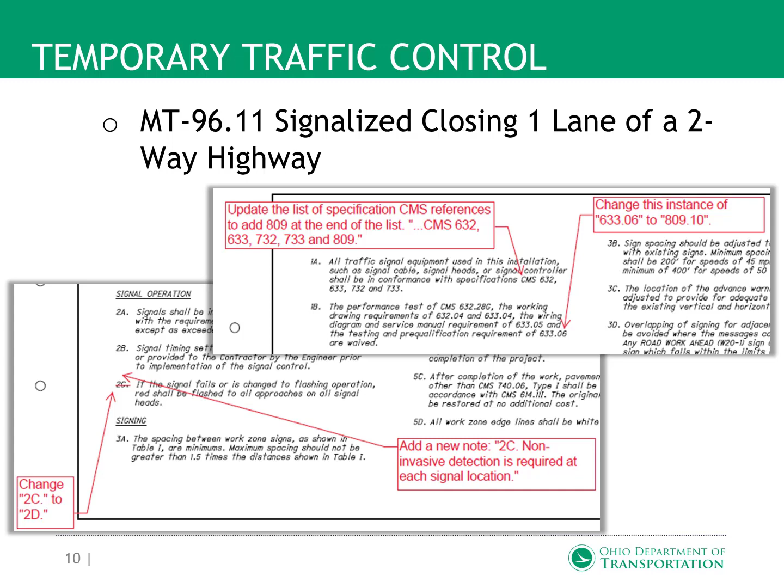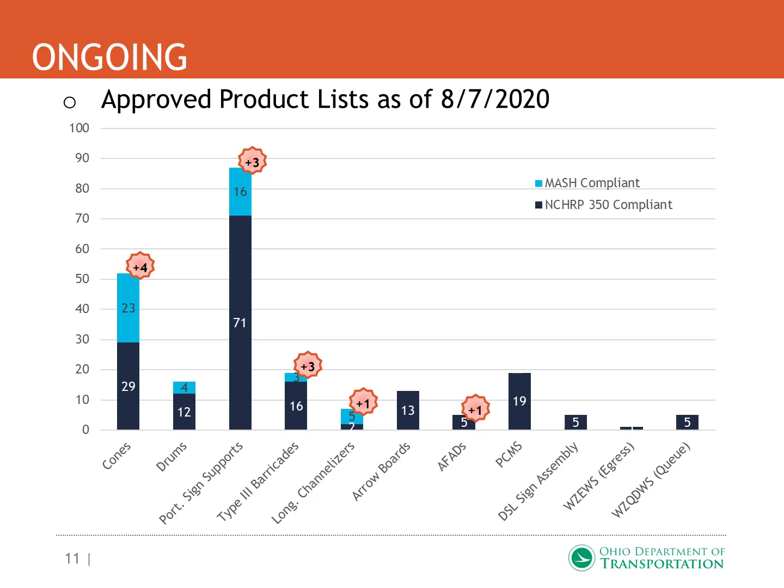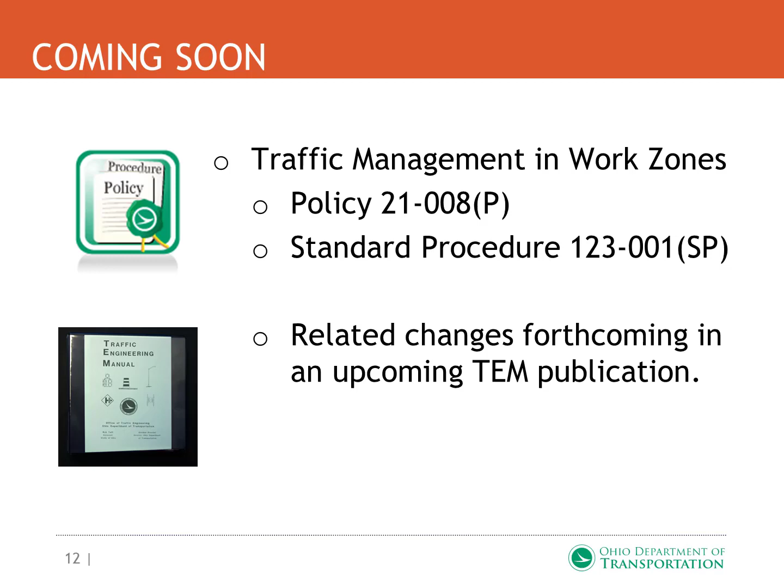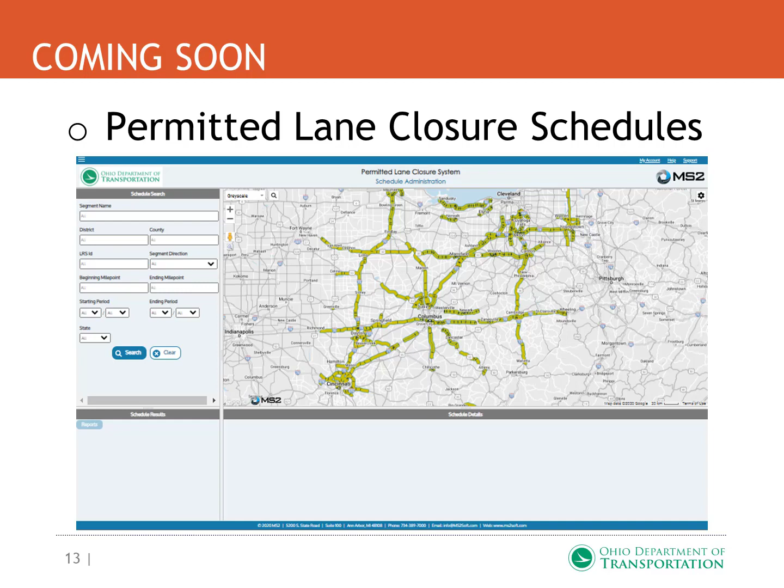Last but not least is the permitted lane closure schedules. This is also coming soon - I know you've heard about this a few times in prior webcasts. The work on this has continued. The system is complete. Right now we have the districts in there creating all of their segments and drafting all their 2019 schedules, getting them prepared for publication. Soon they'll start creating their 2020 schedules and preparing those for publication. We are working through some hurdles with 2020 volume information being impacted by COVID-19, and we're making decisions on how we'll use that data going forward. So we're hoping to have the system ready and launched by the first of the year, if not before then. Stay tuned.